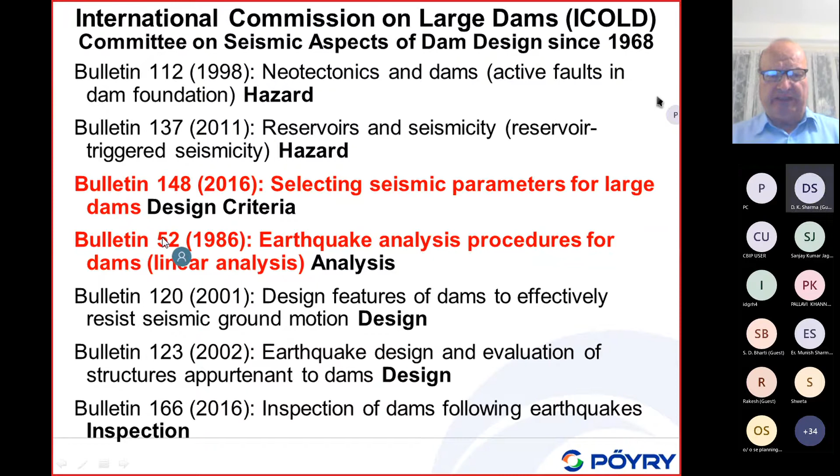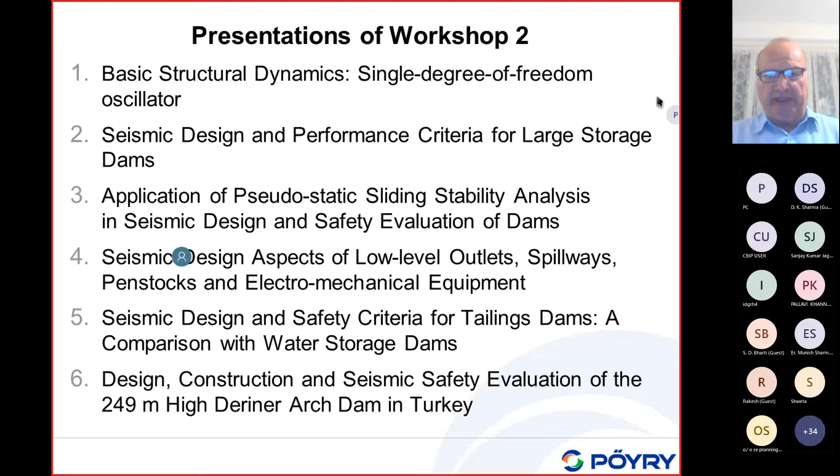This presentation today is related basically to two bulletins. This is bulletin number 148, selecting seismic parameters for large dams. It deals with design criteria, and I will also discuss earthquake analysis methods, which relates basically to bulletin number 52. There are 6 subjects total, maybe I will add one more tomorrow afternoon. The PDFs of these presentations have been sent to ICOLD, and you should be able to get copies.

So let me now start with this subject on structural dynamics, and I would like to talk about single degree of freedom oscillators, because I hope within a few minutes I can give you an overview on structural dynamics and how you can interpret the importance of dynamic effects in structures. Of course this is not a course on structural dynamics, which would take many hours, so I try to condense and focus on the most important aspects.

I hope you see that. What I'm showing here is a single degree of freedom oscillator, which is a mass attached to a spring with stiffness K, and we have some damping, represented by this icon here, represented by the damping coefficient. The mass of a single degree of freedom system is M, and if this mass is on a roller and we apply some dynamic load P of T here, it will move in this direction.

The direction here is given as U. The coordinate of a displacement, relative displacement, is U. Now the equation of motion.

What I discuss here is now a load. P of T is assumed to be a harmonic load, that means P naught times sinus of omega bar T, where omega bar is the excitation frequency, the frequency with which we excite this single degree of freedom oscillator. Omega bar is a frequency in radians per second, but usually we are more familiar with the frequency in hertz, which I call F, the excitation frequency divided by 2 pi. That is the frequency in hertz, usually the term used in practice.

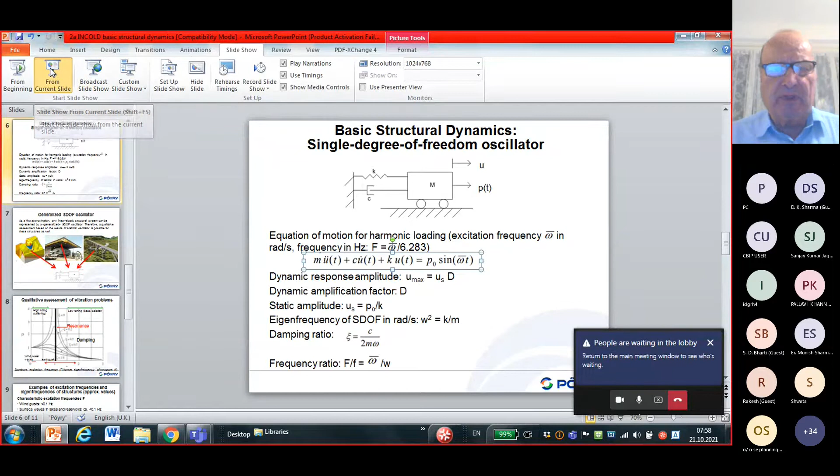Okay, that is what I mentioned here: dynamic response amplitude, the maximum dynamic response, is equal to the static displacement multiplied by the dynamic amplification factor. I hope you can see that.

This is some basic characteristics of single degree of freedom oscillators, and we say the dynamic characteristics of any structural system are eigenfrequencies and the damping ratio. These are the dynamic characteristics of a problem. The static characteristic of a structure is basically the stiffness, but in dynamics we have the eigenfrequency and the damping ratio. If we talk about dynamic characteristics, we always talk about eigenfrequency and damping ratio.

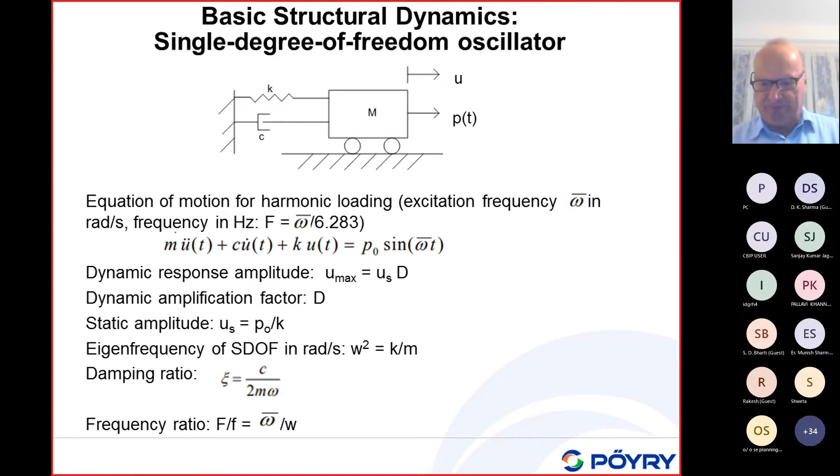So the maximum dynamic response is equal to the static response. For controlling dynamic effects, we have two options. Option one is high tuning, meaning we make a structure very stiff, so the dynamic effects will be very small. The other option, if we want low accelerations, meaning small dynamic amplification factors, is base isolation. Let me give a few examples to build understanding.

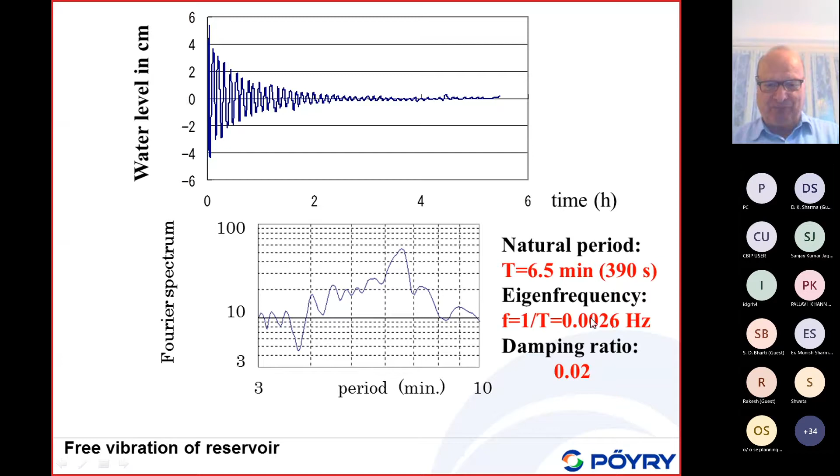We have a dynamic water load here with a frequency ratio, if I go back here, of 0.0026, which means a very small value. The eigenfrequency of this gravity dam is quite high, I would say in the order of 5 to 10 hertz.

So if we use now the ratio 0.0026 divided by 10, it gives 0.00026. And if we go back, that means it gives a value close to 0. And if we see here, close to 0, we are here.

So therefore, we can conclude from this simple diagram that the water wave caused by the earthquake in a reservoir has no dynamic effect on the dam itself, and that the time-dependent water pressure can be calculated by a simple static analysis.

Similarly, if we have a very long penstock, for example, more than 2 kilometers, we also get very low frequency of the pressure fluctuations in a penstock, and therefore the dynamic amplification on the dam or on any structure there will be a static one.

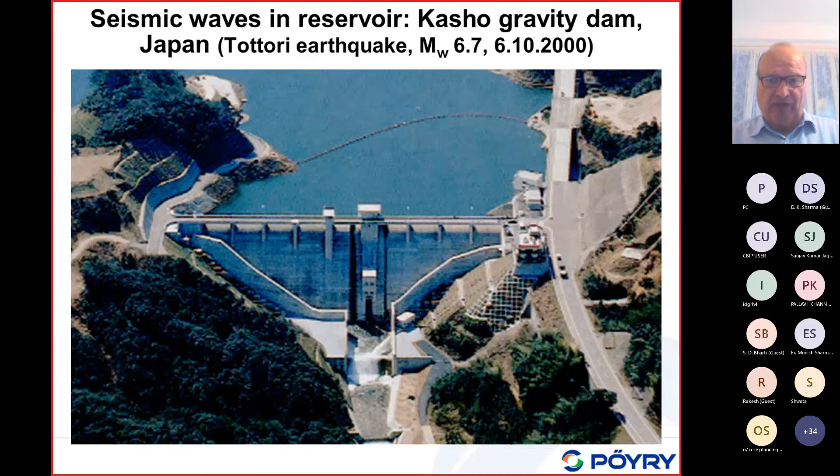The penstocks, and I think I will give once a small presentation on that, on the hydrodynamic actions in penstocks - the penstocks which are in this range where we can have some amplification are very short penstocks, with eigenfrequencies also in the range of earthquake eigenfrequencies. So only penstocks, I would say with a length of less than 100 meters, will also experience amplified dynamic pressures.

That is basically what I wanted to say about basic structural dynamics. And as I said, most of the dynamic problems can be assessed qualitatively by this diagram. So if you have dynamic problems, please do not forget this diagram, and it is very important to understand this single degree of freedom oscillator.

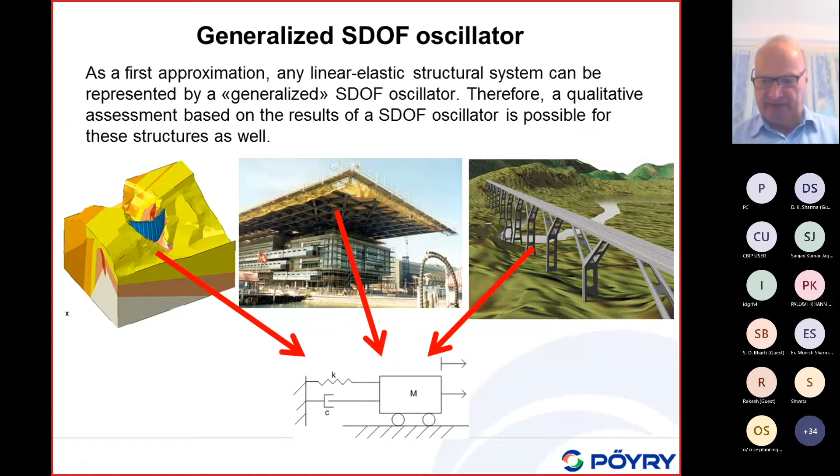As I've mentioned, it is possible in a dynamic analysis to idealize, as a first approximation, the vibration of a concrete arch dam, complex building, or arch bridge by an equivalent single degree of freedom oscillator, what I call a generalized single degree of freedom oscillator. Of course, the stiffness K and damping C have to be calculated by some methods, the same with the applied mass which will be activated by the first mode of vibration. So that is basically these examples which I wanted to show.

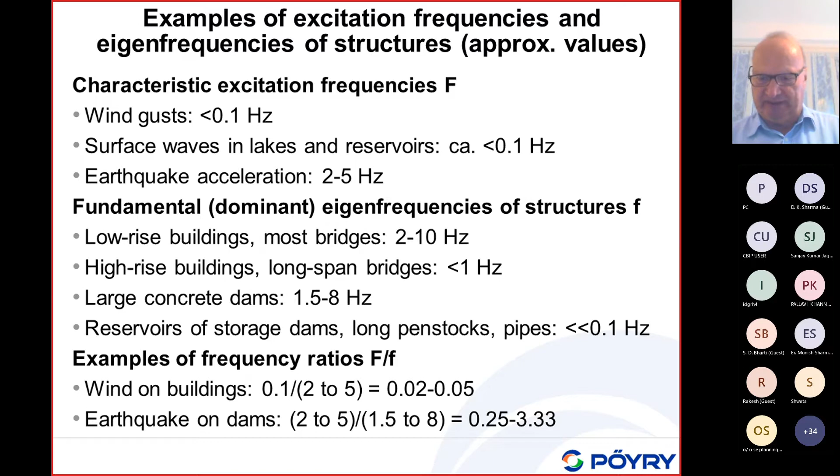So that concludes this first introduction, which is the basics, let me say, of earthquake engineering.

So let me come now to the main subject, and I will talk about the seismic design and performance criteria of large dams. I just have to ask, do you see the slide? Sorry, do you see the slide?

Okay, so if I talk about the seismic design criteria and the safety criteria of large dams, I have to discuss first what structures, or what are the key structures, to be looked at.

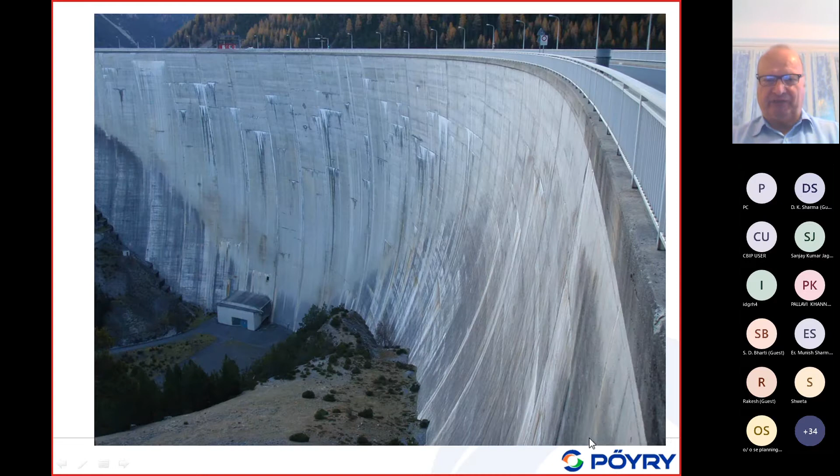I'm looking here first at the dam body and the safety critical elements. We have a dam body here. We are interested in the safety of the dam body, and up to now, I must say, when seismic safety assessments have been done, people have focused on the dam body.

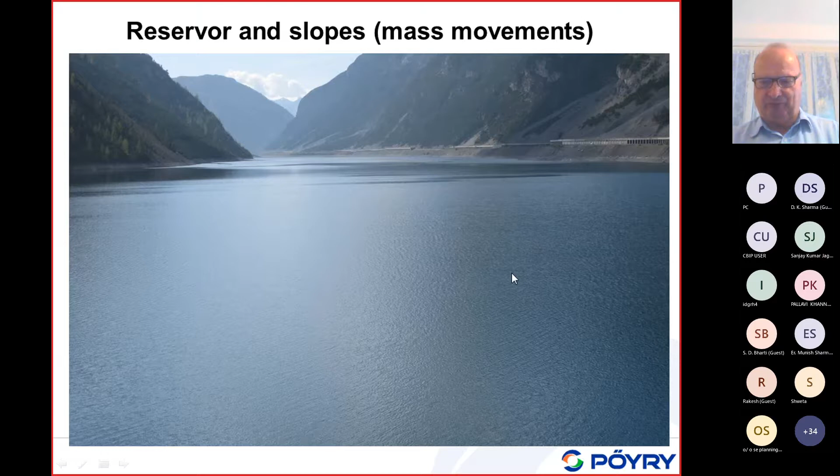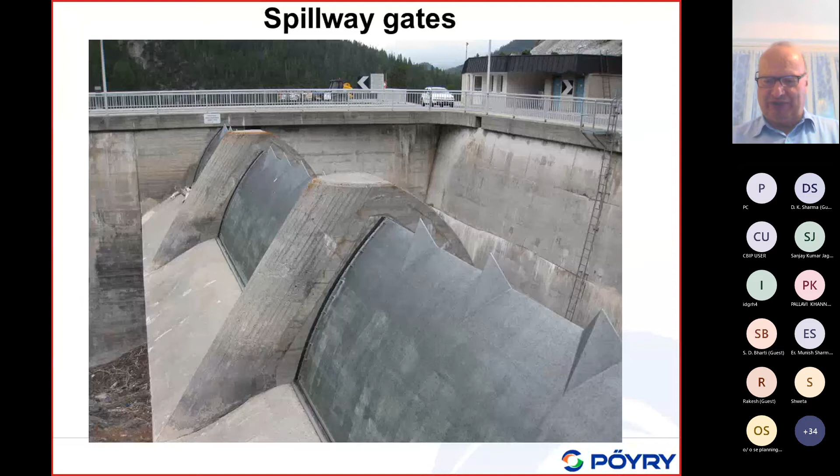The next item which is important for dams are spillway gates. As we can see here, these are small gates. In Switzerland, we usually have small gates because the spillways are small. The spillways are small because the catchments are small, and we do not have the very intensive rain like you have during the monsoon.

The fourth element, besides the dam body, reservoir, and spillway, we have low-level outlets, or bottom outlets. I will just mention once more, bottom outlets are compulsory for any dam in Switzerland. This is not the case for many other countries, but in Switzerland the dam safety authorities and the dam safety codes and regulations require bottom outlets.

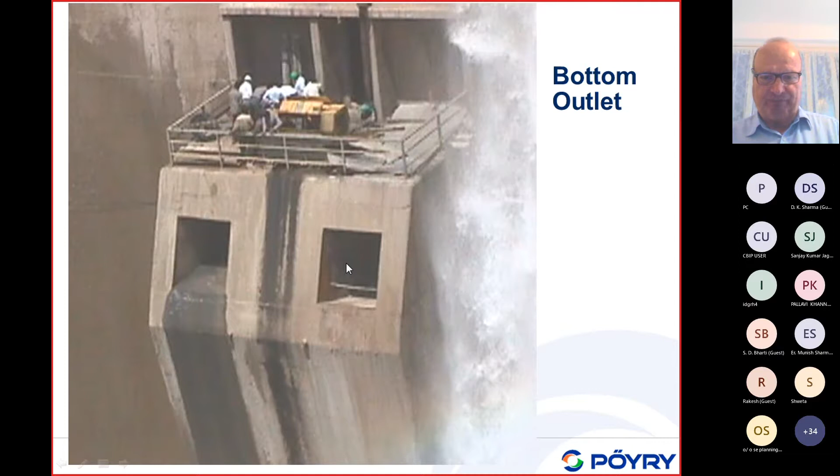And here I would just like to show a bottom outlet from a dam in Iran. Some people standing there opening the gates of these outlets. I want to show a sequence of slides. Okay, you see here they opened, and they are still opening, and it took some time, as you can see, because in this reservoir there was a lot of sedimentation. So if this low-level outlet is covered by sediments, it may be difficult not only to open the gates but also to use them.

What is the matter, as you can really see very nicely from the water pressure, is that it is eventually pressed through these gates. Near the dam we have very fine silty material, not gravel, which is deposited further upstream and is pressed through the gate. This also shows that sedimentation or landslides may be critical for the safety of dams because they may block the intakes of low-level outlets, or also intakes of some intermediate-level or low-level spillway outlets.

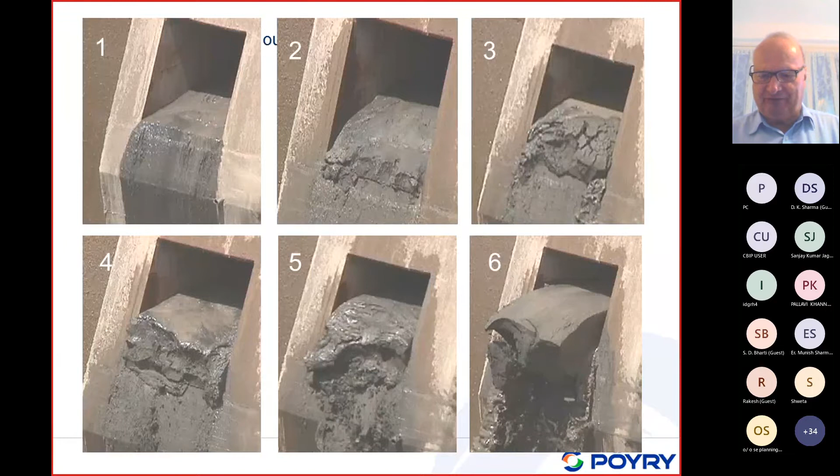So it is important to have bottom outlets. You see here, after this, plastic silty material has been pushed out. Eventually, this bottom outlet is working properly, and we see what is being released is highly sedimented water flow. So therefore, it is quite important, basically for us, that the bottom outlet is used in an emergency case, and that it has to be operable at all times. Therefore, it has to be checked. The operation has to be checked at least once per year in our case. This is a standard practice for the annual safety assessment of dams in Switzerland.

Of course, there are environmental problems if you dispatch so much sediment into a downstream river, it would kill the fish. So in our case, in Switzerland, we would not allow releasing this kind of sediment. So therefore, if you open that gate, it would be best to open it and check it during, for example, the monsoon season.

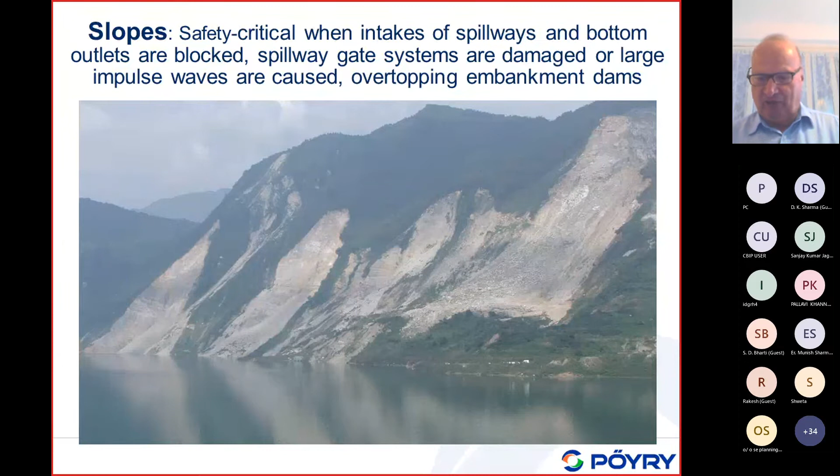Now just for your interest, when I talked about slope stability, the most famous landslide, which you may not have heard of yet, is the Usoy landslide dam, creating Lake Sarez in Tajikistan in Central Asia. This dam is not man-made, it is earthquake-made, a natural dam, with a height of 650 meters - more than twice as high as the highest man-made dam. So the largest dam in the world is a natural dam, created by a landslide triggered by an earthquake of magnitude 7.3 in 1911, and this dam still exists.

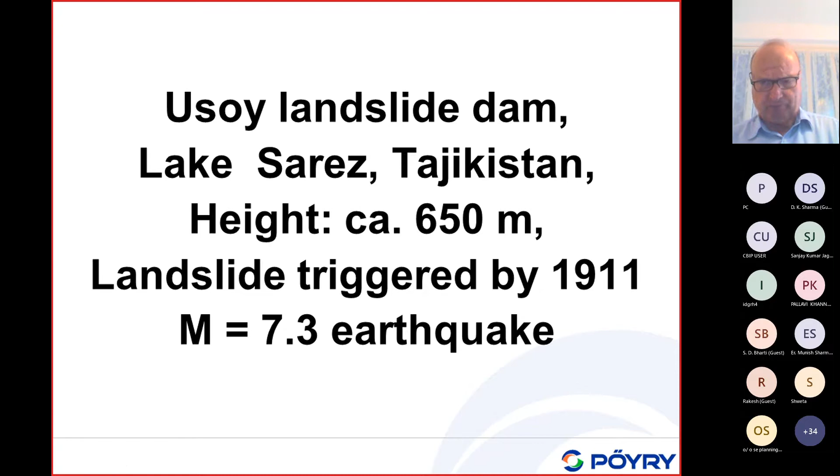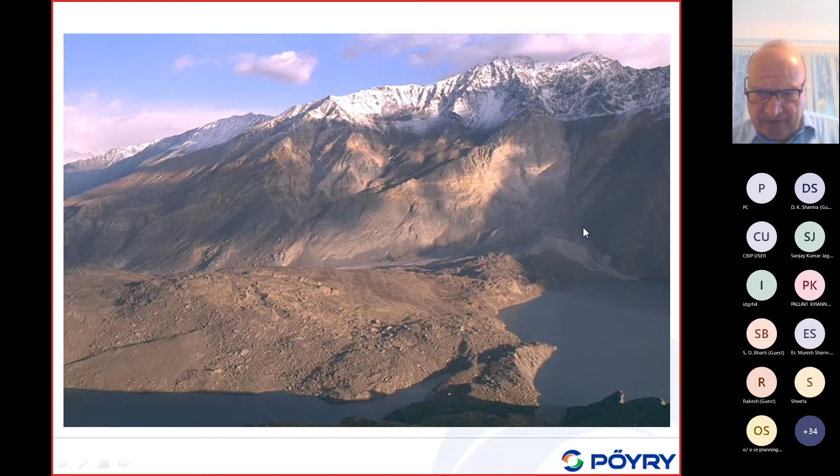We see here basically a big landslide occurred from this side and covered this valley with about 2,500 million cubic meters of material. You see here the crest of this dam is very irregular. It forms a very big dam which still exists today. There is, of course, some water seeping through the dam causing some erosion, but this dam has existed already for 110 years, and there are several plans to make this dam safer and to install an alarm system.

Such help has been provided by the Swiss government. We see here maybe better - this is basically the irregular dam crest, and this shows the area where this big rock and ice slide occurred. It was also reported that this dam has settled already 90 meters since 1911. But the dam is still there, and it creates a reservoir of several billion cubic meters of water. So it is really a safety problem for people living downstream.

So what I want to say is you can create, during strong earthquakes in some mountainous regions, like here in the Pamir Mountains, very large mass movements. And if large mass movements occur into a reservoir - in this case, further up in the reservoir, some further potential landslides have been found - and if these landslides would also be triggered by an earthquake, the impulse wave may overtop and erode the top portion of the dam and release part of the reservoir or the whole reservoir. So it is quite dangerous.

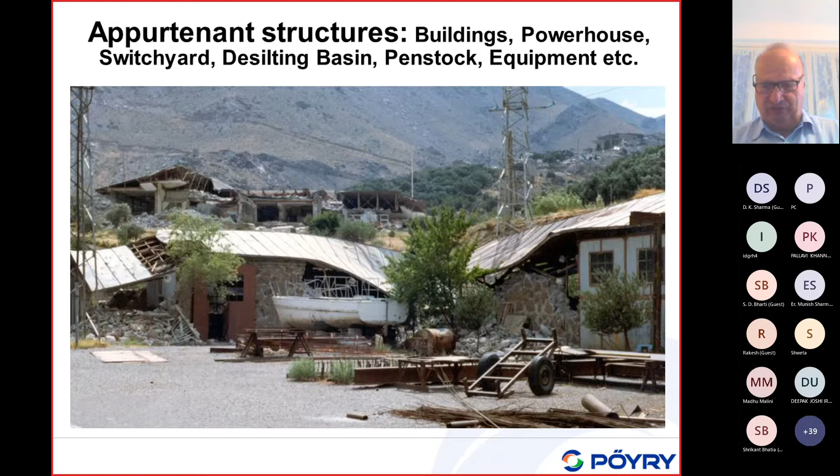This is just an introduction to where we must apply different safety criteria. Safety criteria must be applied not only to the dam body, which has been standard practice up to now, but also checked for the spillway, low level outlet, the abutments at the dam site, the reservoir slopes, and even slopes in the catchment, as the case in India has shown in February.

So what are the critical issues? I would like to repeat here once more, because I feel it is quite essential. The seismic hazard is a multi-hazard. You must really recognize this. It is not only ground shaking, though ground shaking is the main issue addressed in earthquake regulations, guidelines, and building codes.

In a large dam project, we can have fault movement in the dam foundation or discontinuities near major faults, which can be activated during strong earthquakes, causing structural distortions. We can also have fault movements in a reservoir, which may cause water waves or loss of freeboard. This has been a rare case, but there are quite a few dams basically on faults or discontinuities which could move during strong earthquakes.

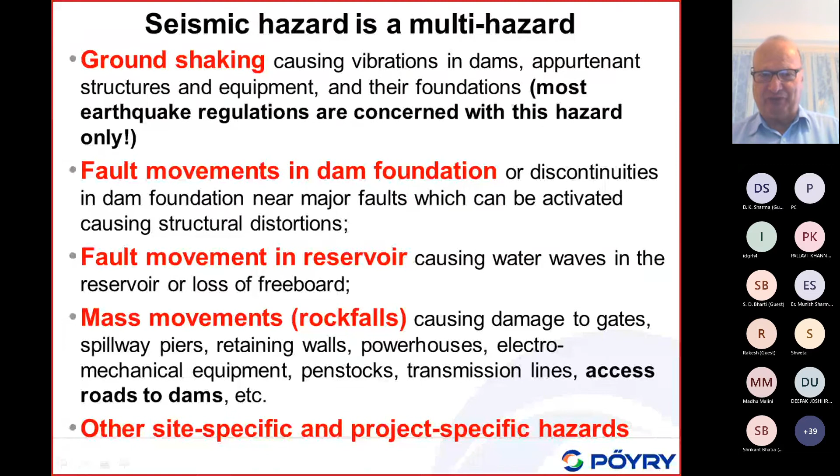These mass movements basically have been ignored or assessed wrongly by geologists, for example, who have their own definitions of safety, different from what we talk about in dam safety. There are other site-specific and project-specific hazards depending on materials. If you have embankment dams made of sandy, silty material, we could have liquefaction, or build-up of uplift pressures in some concrete structures. So this is quite important. If you do a seismic hazard assessment, you should take into account that these are multi-hazards.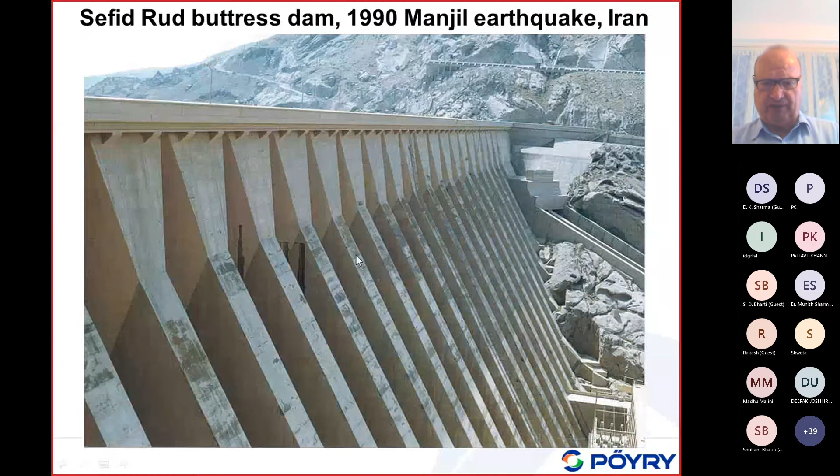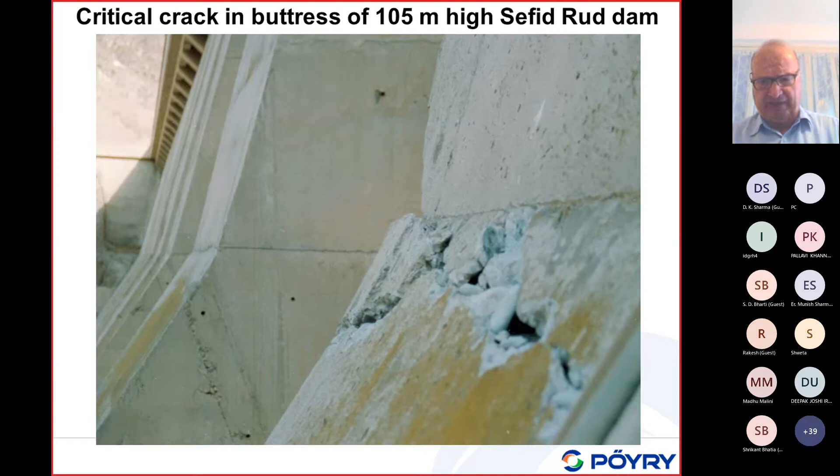Some of the cracks are quite large at the kink of the downstream face. These are locations of stress concentrations, which are basically critical locations. We see these cracks developed along concrete lift joints, which were spaced about every 2 meters. At the surface, the cracks look quite dramatic, but this is only spalling off of concrete. On the surface, the crack width is only a few millimeters.

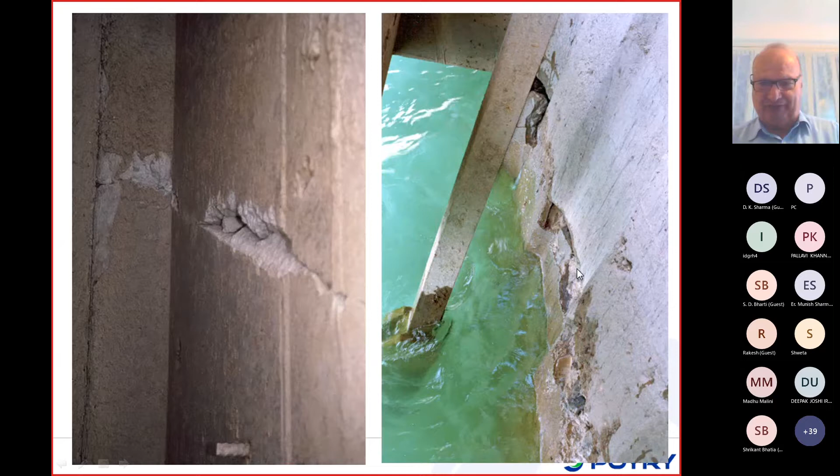Also at the upstream face, near a gate here, the power intake, you can see there is quite some spalling off of concrete at the location of a crack. But as I said, the crack is not 20 centimeters thick, it is finally only a few millimeters. This is for concrete dams. I mentioned already for embankment dams, we also have cracks.

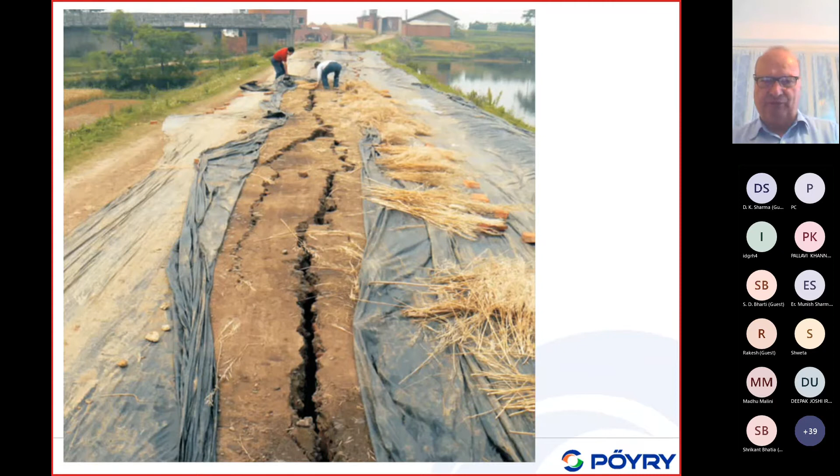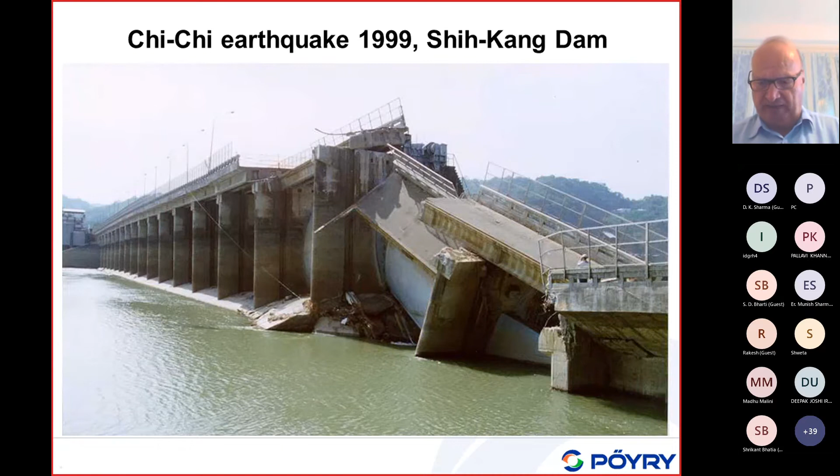Often they occur in longitudinal direction along the crest. The other issue I mentioned is the effect of faults. This is the Chi-Chi earthquake in Taiwan, where a fault passed through this Shih-Kang Weir, with vertical offsets in a range of 5 meters. In this range, these two openings were completely destroyed. Since the reservoir was small, it was released here, but there are about 20 gates used during monsoon, so during monsoon season you release much more water than was released through these two damaged openings. So it didn't cause further damage downstream of the dam.

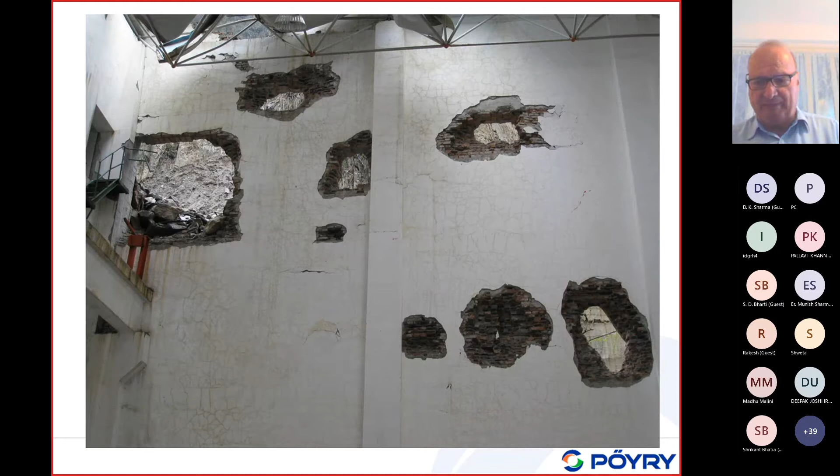Also, the rock falls I mentioned may be very critical. Here is the rock fall effect on the powerhouse. This is an infill wall, and you can see it looks like people shooting with artillery in this building, and the stones which fell down basically penetrated completely this unreinforced infill wall.

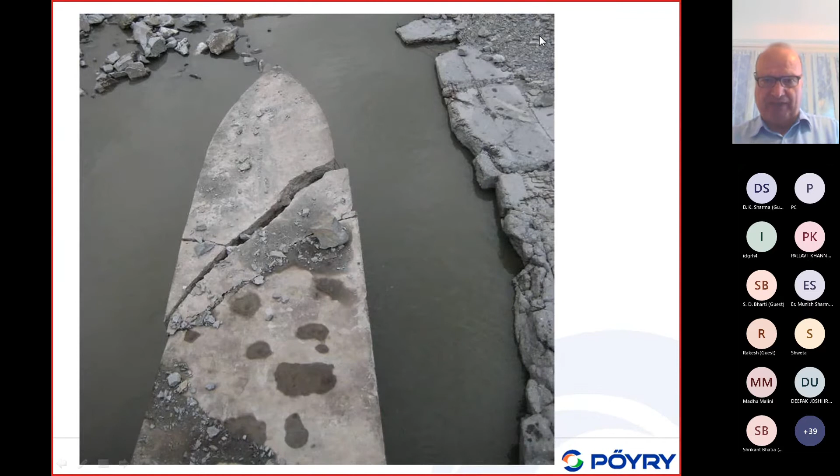This is a photo from a run-of-river power plant damaged by the Wenchuan earthquake in China in 2008. This damage is not due to ground shaking, and this also is not due to ground shaking. It is at the dam site, due to rock falls. So rock falls are quite important.

We see here there are some rocks—we don't see all, but you may be able to see here a kind of crack, a shear type of crack, which is a result of the impact of a boulder of several cubic meters on this pier. So rock falls—this is not due to ground shaking, this is basically all rock fall damage. As I mentioned, rock falls have been

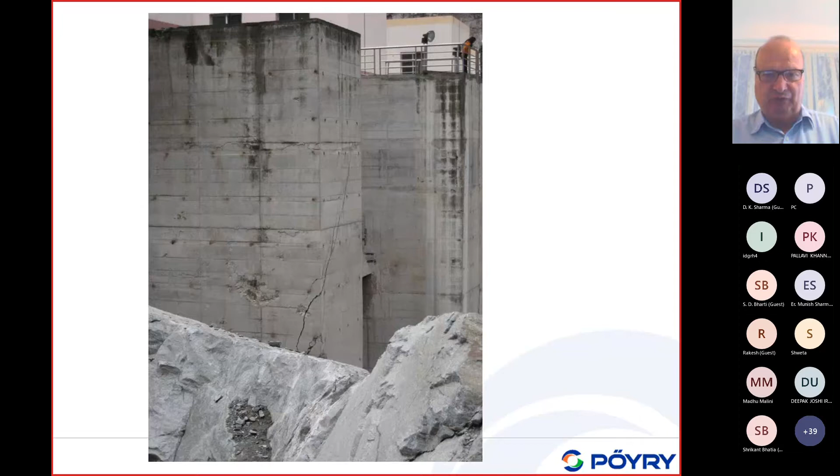underestimated at many dam sites. So it is necessary to have a close look at them, especially based on the experience from the Wenchuan earthquake, where in the epicentral region, more people were killed due to the effects of mass movements than due to

buildings destroyed due to ground shaking. Or here, it also shows some landslides. Of course, if a landslide occurs, it may also block here. This could be a type of landslide which may damage parts of these concrete piers of run-of-river power plants. And this picture I'm also using to show

this here is the weir with gated spillway. If during the earthquake, or after the earthquake, it is not possible to open the gates—they were closed here at the time of the earthquake, here is a power intake—if you are not able to open the gates after the earthquake, that can be hours or days after the earthquake, depending on the amount of water flowing into the reservoir and the size of the reservoir, you may have overtopping of this dam.

So therefore, it is essential that after the earthquake you are able to operate the gates. In these run-of-river power plants, in the case of dams, you must be able to open the spillways if you have gated spillways, and also the low-level outlets to lower the reservoir. I will show that, but here it was not possible. So if you cannot

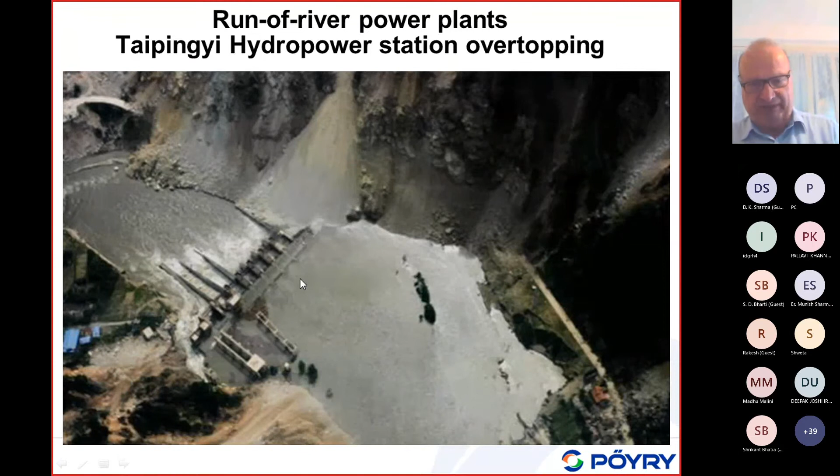lower the reservoir, or if you cannot control the water level in the reservoir, it may create a safety problem on this dam. Depending on the overtopping—because run-of-river power plants are not very high, maybe 20, 30 meters or even less—if you have an overtopping of, let me say, 2 meters, it would create increased water pressure, and the sliding stability with this overtopping may be less than what is required. So for this kind of small dam, overtopping may have a detrimental effect on the static sliding stability of the dam after the earthquake. So the overtopping may create also a safety problem to this

piers. Now, I mentioned already what are the failure modes of these run-of-river power plants if you are not able to control the reservoir. Now, if we look into embankment dams, what can happen during strong earthquakes to embankment dams, or rockfill dams, which are a type of embankment dams.

There are basically two modes which you have to check for all embankment dams, for the dam body. Basically, you have to check overtopping. I've shown that before, overtopping of a dam crest.

Overtopping of a dam crest can be caused due to settlement of the dam crest, meaning compaction of the dam due to ground shaking. There was one dam in the Philippines which was shaken strongly during a strong earthquake in 1990, which settled almost 2.8 meters. So due to compaction, you can have substantial settlement, and if there is not sufficient freeboard, the dam could overtop just after the earthquake, depending on the water level in the reservoir.

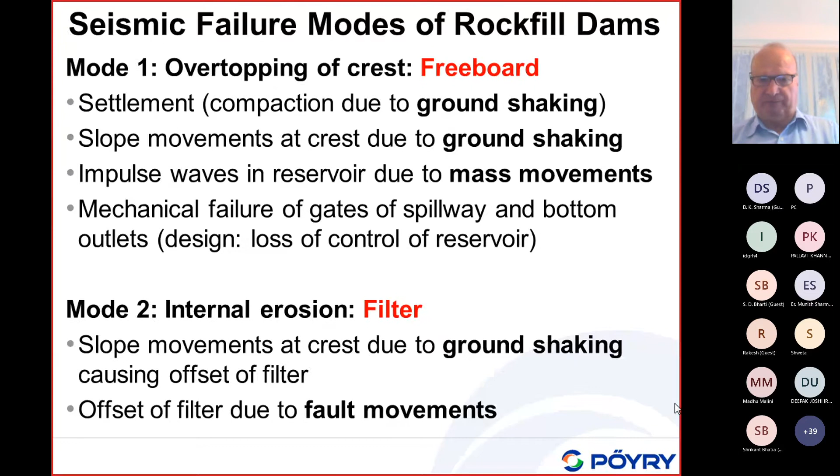Now, what are the seismic design criteria? We consider here different types. I have shown this, but I will discuss it in greater detail. We have a dam body and the safety relevant or safety critical elements, which are the gated spillway and bottom outlet. In addition, there are also some critical slopes which have to be added there.

We consider two levels of earthquakes in the design. The first one is the operating basis earthquake, which is the current state of design, with ground motion parameters determined for return periods of 145 years, if a probabilistic seismic hazard analysis is considered. We propose that as a guideline, but this is not a fixed value. Therefore, it is negotiable with the dam owner.

In some countries, we have seen in Iran, people like to use for the OBE 500 years. In Germany, I think it's 250 years. In Australia, it may be 1,000 years. So this value can be changed, but we should say this is a kind of guideline which would represent a probability of exceedance of 50% in 100 years, which would give a return period of 145 years.

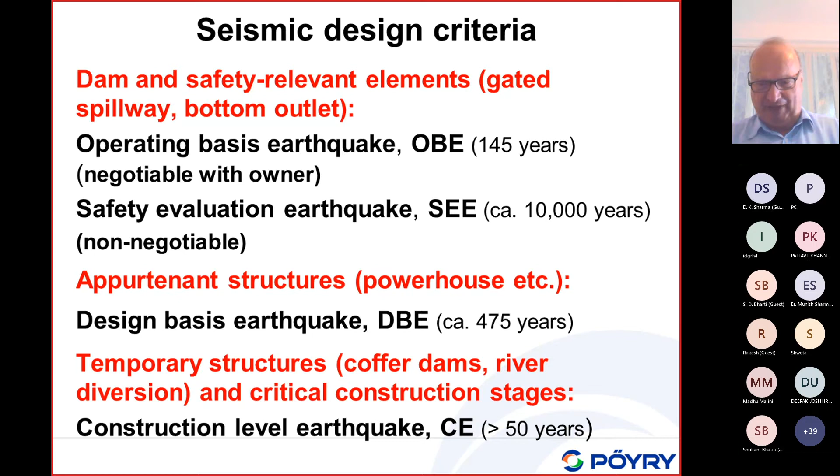Also, for temporary structures, cofferdams, river diversions, and critical construction stages, you must take into account some level of earthquake. It is like with a diversion flood. If your diversion flood has a return period of 100 years, it would be reasonable to use a return period for cofferdams and river diversions also in the range of 100 years, similar to a diversion flood. So you should take that into account.

Now, based on what I have just shown, we have different types of earthquakes. For the dam, we have two levels: the operating basis earthquake and the safety evaluation earthquake. In addition, we have the design basis earthquake used for appurtenant structures, meaning powerhouse, desander, and so on, and we have a construction level earthquake. So we have four types of earthquakes to be used in the seismic design and analysis of dams.

For the safety evaluation earthquake, we can use two methods for determining the ground motion parameters. It can be done by what I would call a worst case earthquake scenario, also called maximum credible earthquake, which is the earthquake scenario that may create the strongest ground shaking at the dam site. This is a deterministic analysis because it is based on an earthquake scenario. Secondly, we can use a probabilistic seismic hazard analysis to determine the parameters of a maximum design earthquake, related to a return period of 10,000 years for a high consequence dam.

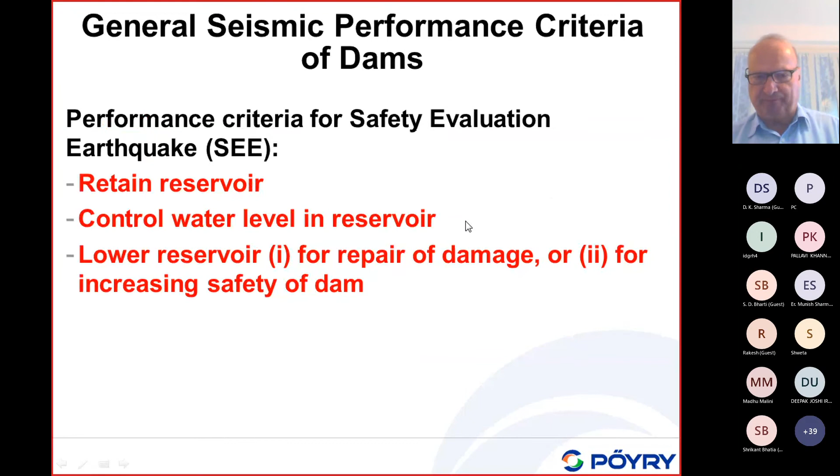That is the effect of design basis earthquake of reservoir triggered seismicity. Reservoir triggered seismicity has no effect on the safety evaluation earthquake. So for the safety of the dam, reservoir triggered seismic events are not relevant, but they may be relevant for the design basis earthquake and operating basis earthquake, because the powerhouse may be damaged due to reservoir triggered seismicity, but the dam is still safe. We may also have some smaller damage which has to be checked in case of reservoir triggered seismicity for the operating basis earthquake.

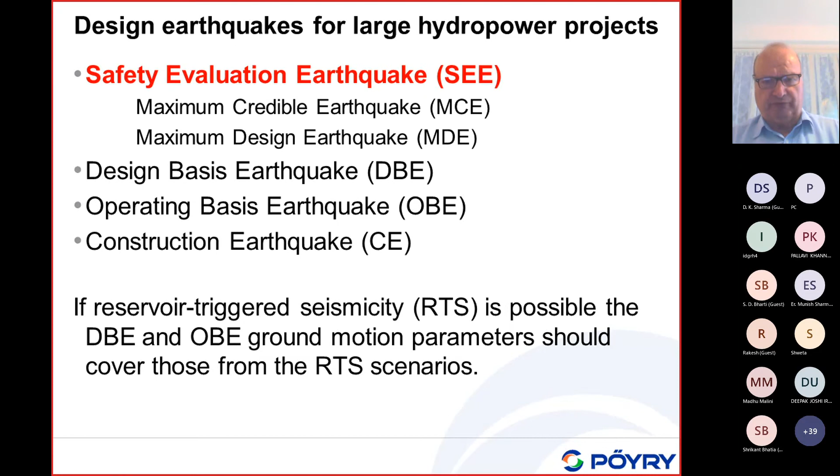Reservoir triggered seismicity, which I will discuss separately, is also based on some scenario. We define scenarios like the worst case scenario, the maximum reservoir triggered earthquake, but this is quite hypothetical and includes very large uncertainties. So it is not really possible to predict the occurrence of reservoir-triggered seismicity. There is only some probability, and it is not possible to include them in a probabilistic seismic hazard analysis, because these are specific events which occur mostly during the first few years of operation or during impounding of a reservoir.

Now, where do we have to apply the seismic design criteria which I just mentioned? I would like to show this slide and one more, and then we will stop for a break. I mentioned this already, just a repetition, that two earthquake levels are considered for the following structures, and now I'm talking about high consequence dams.

We consider two earthquakes, the operating basis earthquake and the safety evaluation earthquake, for the dam body. It's important to point out that when we talk about the dam body, it must include saddle dams. If you have saddle dams where the reservoir can be released, as the case showed in Laos about three years ago, then it is obvious that the saddle dams must have exactly the same seismic safety criteria as the dam body of the main dam. So please don't forget that.

Many dams have several saddle dams, especially dams in relatively flat areas. I think in the Panama Canal, which I was involved in, there is one main dam and up to about 30 saddle dams. Some, of course, are small, where the reservoir could not be released, but some are large ones. These saddle dams may be smaller, and the engineer may only draw attention to the main dam, but you must consider saddle dams properly. It's important.